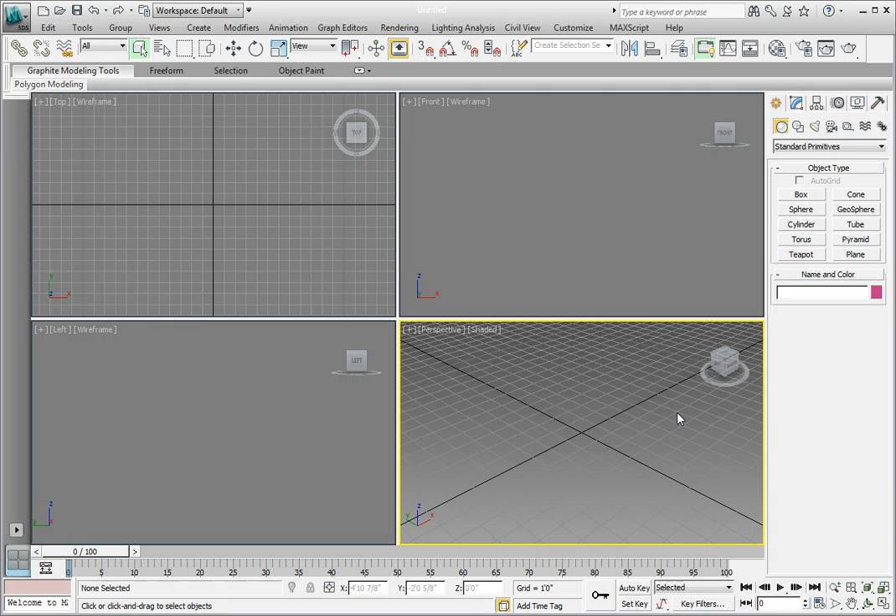We have a scene that has two scene states, one daytime and one nighttime, and two cameras. We want to render both those cameras using a different scene state for each camera. From the Application button, click Open, navigate to the Chapter 13 subdirectory, and open the file CH13_Batch_Render01.max.

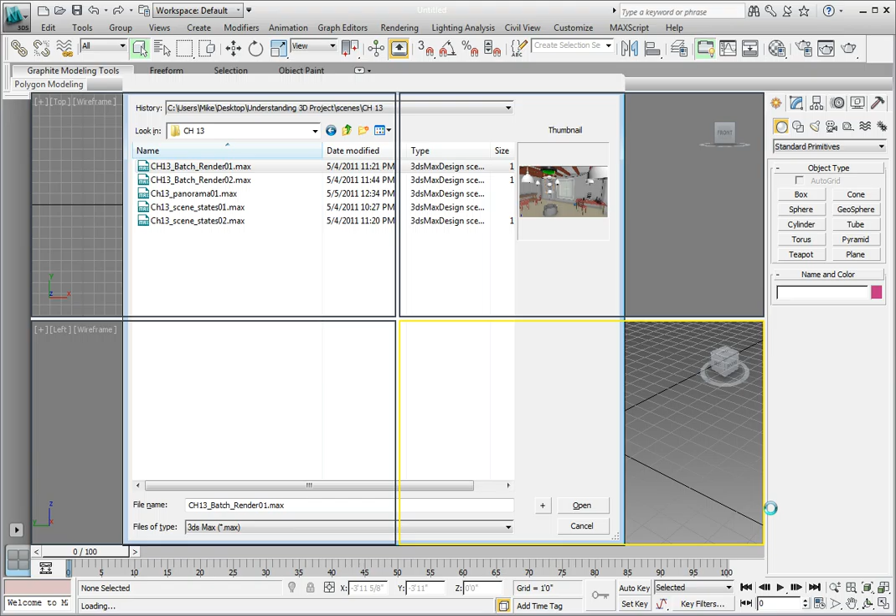From the Rendering menu, choose Batch Render from the drop-down. This opens the Batch Render dialog. Batch rendering allows you to use a single interface to queue up multiple cameras and allows you to assign scene states to each camera, as well as use different rendering presets for each camera. This gives you a lot of flexibility when working with single scene files in which you have several scene states that you need to render.

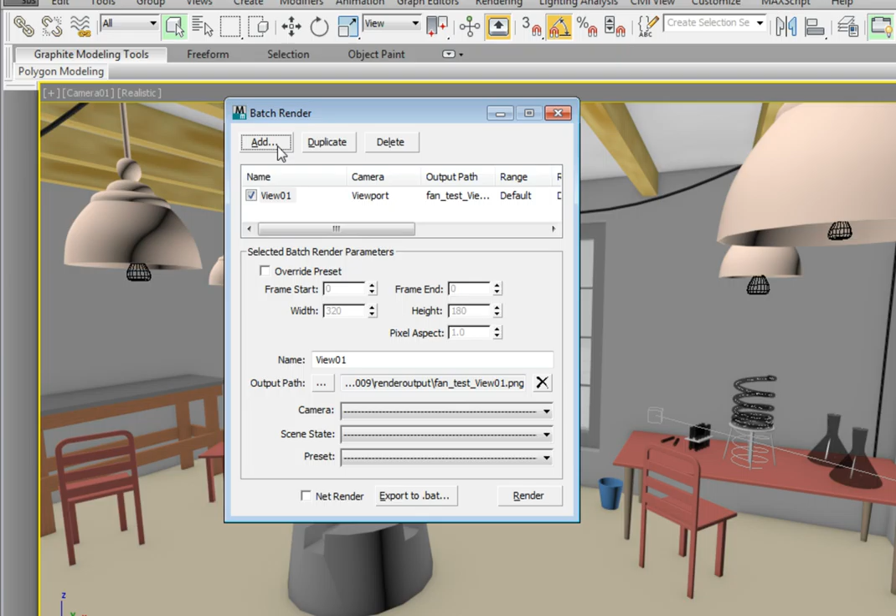On the upper left-hand side, click the Add button. You'll notice that there's now a View 01 option in the render queue. If we look at the bottom of the dialog box, we'll see that we have options to change the name of this particular entry, the output path. We can change the rendering resolution if we want, and we can set the camera, scene states, and rendering presets that we'll use for this particular entry in the render queue.

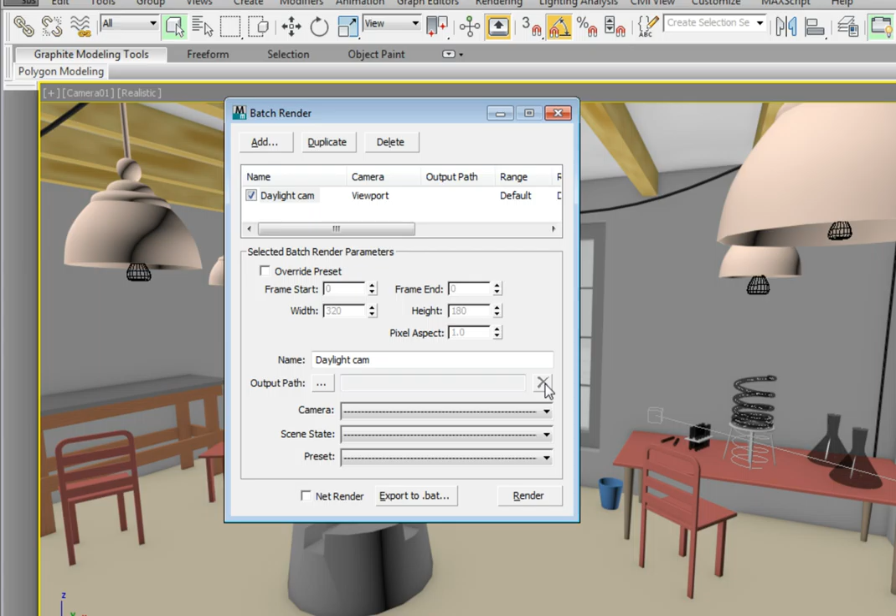In the name entry, type in Daylight Cam, then press Enter to accept the name change. Click the X to the right of the output path to clear the entry. So regardless of what output path was in the file, we can clear it and put this rendering where we want. Go ahead and click the output path options now, and navigate to the Render Output directory inside of the Understanding 3D Project folder. In the file name area, type in daylightcam.png, then click Save to close the dialog and return to the batch renderer.

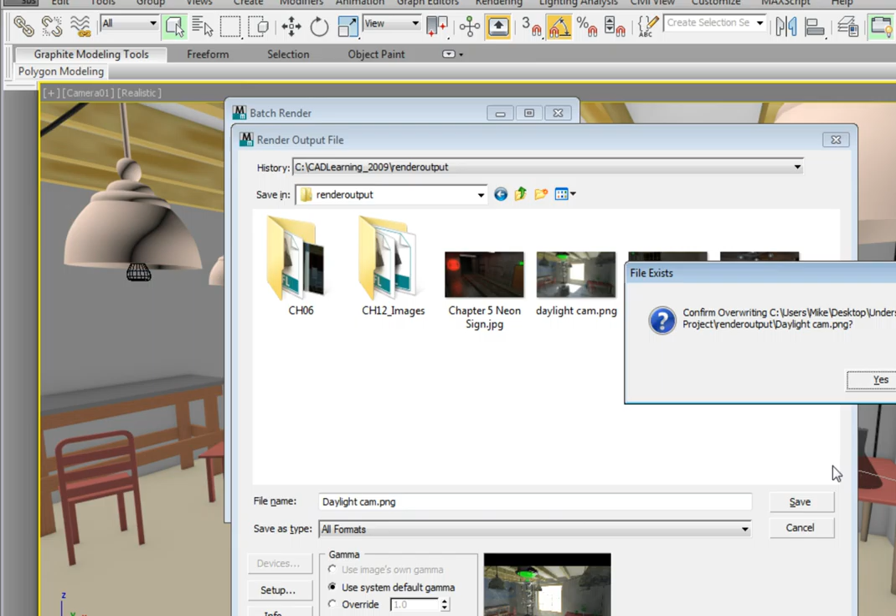In the camera options, select Camera 1 from the drop-down list. This will set the entry in the queue to render Camera 1 from the scene. In the Scene States drop-down, choose the Daylight Scene State. This will set the parameters of the scene to the parameters we saved in the Daylight Scene State when this camera renders. Then in the Presets drop-down, select the Test Render preset. This will render using the render settings that have been configured in the Test Render preset. We've set up our Daylight Cam to render using Camera 1 with the scene state set to Daylight, and it will render using the Test Render rendering preset options.

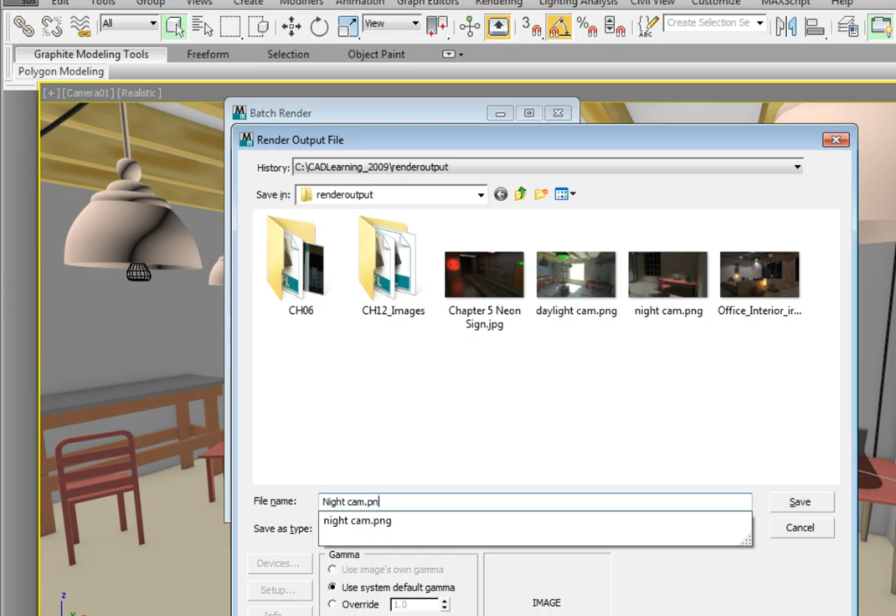Now go ahead and click the Add button one more time. This will create a new entry in our batch render queue. Name this entry Night Cam, then press Enter. Click the X to clear the output path entry. Then click on the output path option. In the dialog, navigate to the Render Output directory. Name the file nightcam.png and press Save to close the dialog and return to the batch render window.

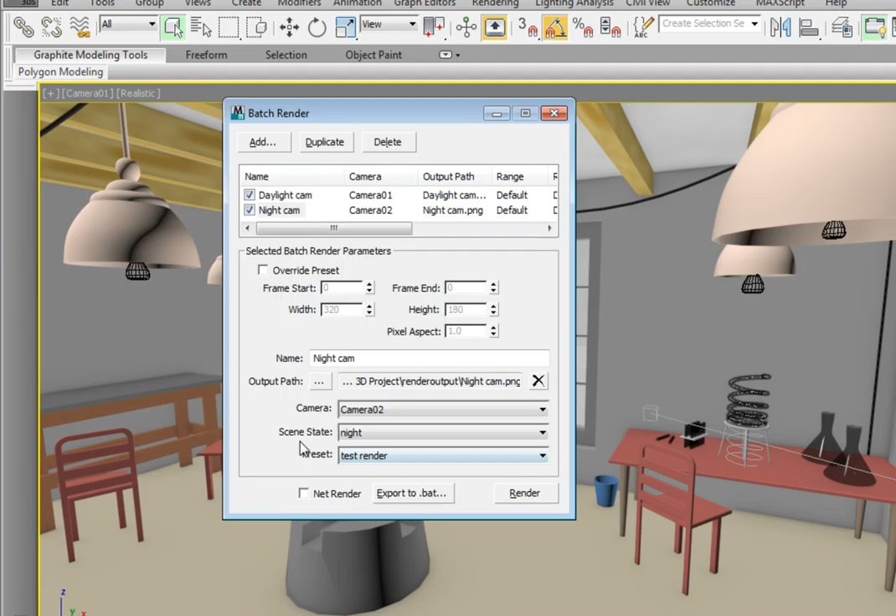From the camera drop-down, this time choose Camera 2 and select the Night Scene State from the Scene States drop-down. From the Preset drop-down, choose the Test Render preset option. Before we render this, let's go ahead and save the file with an incremental file name. Click on the Application button, Save As. From the dialog, click the Increment on Save button.

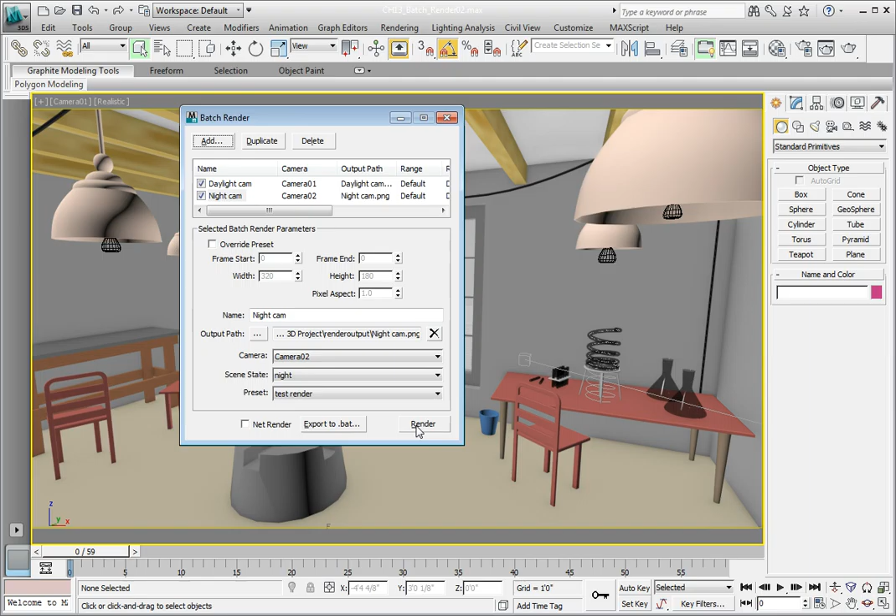Click back in the Batch Render dialog and let's render this queue. At the bottom right, you'll see a Render button. Go ahead and click the Render button to start the rendering process. What's going to happen is the batch render will step through the render queue and render each entry one after the next.